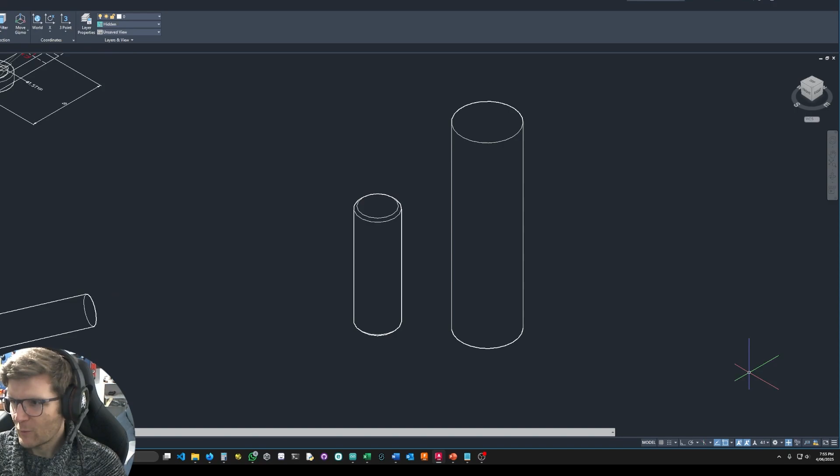You want to make cylinders to start because that's a good shape. Basically, a cylinder is an extruded circle. You have a circle, you pull it, and you stretch it out. So what we're first going to do, we're going to go back to the original view, which is the one you should be in. All right, we're in a top-facing and two-dimensional view.

So what we want to do, let's start with the crank pin just because it's simpler than the chamfered one. You grab it, you copy, you move the duplicate over here. Then what we're going to do next is switch to the 3D basics or 3D modeling. It does not matter as long as you switch. Pressing the gear causes the ribbon on the top left to change, and you'll see different commands now. But we're going to use the commands by typing them.

The very next thing you want to do is select the circle. And then you click on this view cube. You click not anywhere, you click on the bottom right. And by having the circle selected, it's going to change the camera view to a 3D camera view that is focused on the subject, which is the thing that you have selected. You have it now, and you know that the crank pin height is 42.

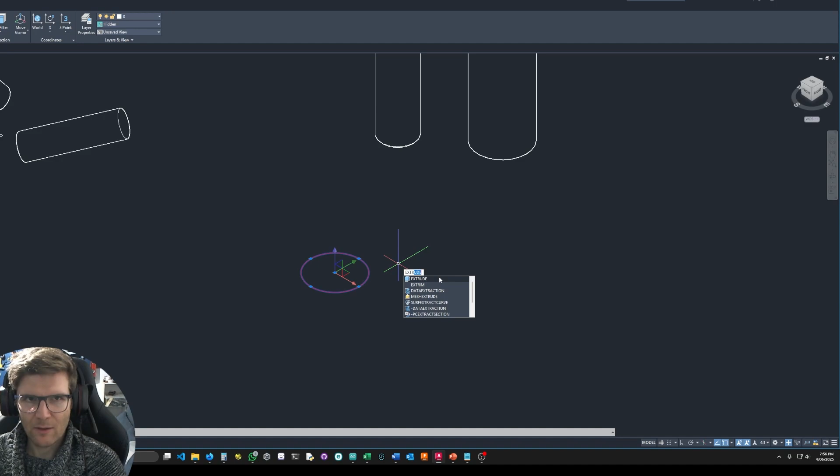So you extrude. That command is also present in the ribbon, but we're going to type it in. Extrude. Cool. And now you notice you selected it. If you pull downwards, you extrude downwards. If you go upwards, it extrudes upwards. And you're going to just be anywhere on the upper side and then type in 42, not 24, 42. Bam, you got a crank pin. That's as easy as it gets.

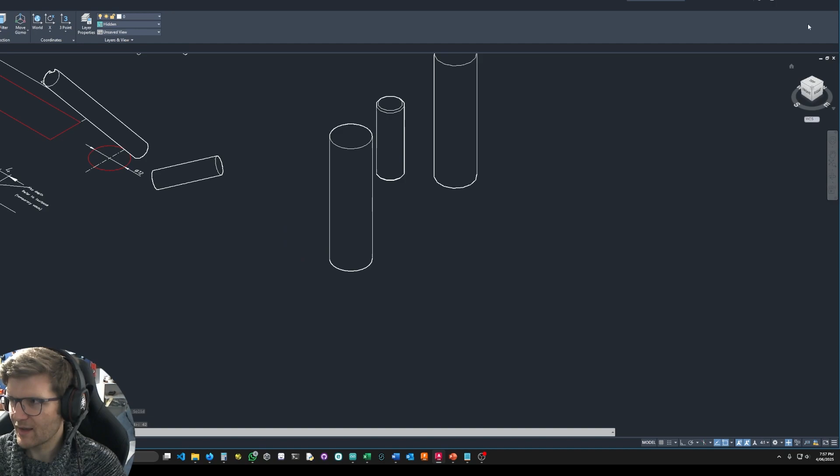Make sure that if you want to look around your 3D model, you have the model selected, because otherwise it goes crazy. You just want to have your subject of interest selected while you navigate. That way the camera always knows what to look at. Otherwise it gets confused, and then you have to zoom back into your view.

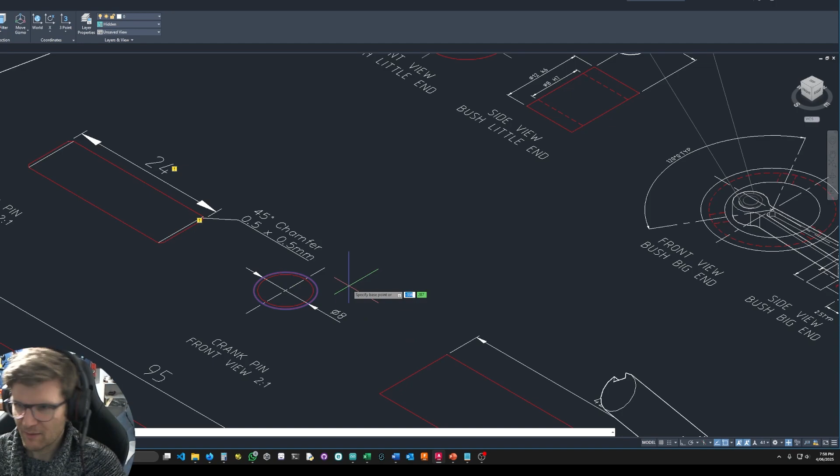All right, that's one. Now we're going to make this one, which is the crank. No, that's the gudgeon pin. Yep. So the gudgeon pin, as you might know, it's a cylinder with an outer diameter of 8 and a height of 24. So we're not going to focus on this inner side yet. What we do is first extrude this shape. So you copy it, you select it from wherever it is, you move it out to an area to work on it. So we have our 8 diameter circle.

We're going to extrude it to a height of 24. Same command, extrude. Specify the height. Again, upward. Type in 24. Now we're almost there. All we've got to do now is make the chamfers. For the chamfers, we're not going to use a 2D command or do any sort of manual tricks.

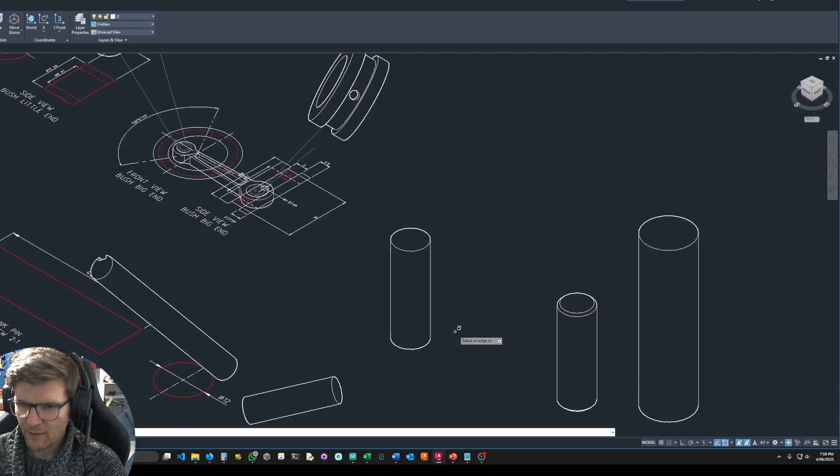We are going to use a very simple 3D command, which is called chamfer edge, which offers 2 arguments, loop or distance. We're going to use the distance one because we know that it is 0.5 times 0.5 for the chamfer, which amounts to creating a 45-degree chamfer. So specifying the distance, let's type in distance. You can type in dist or the whole thing.

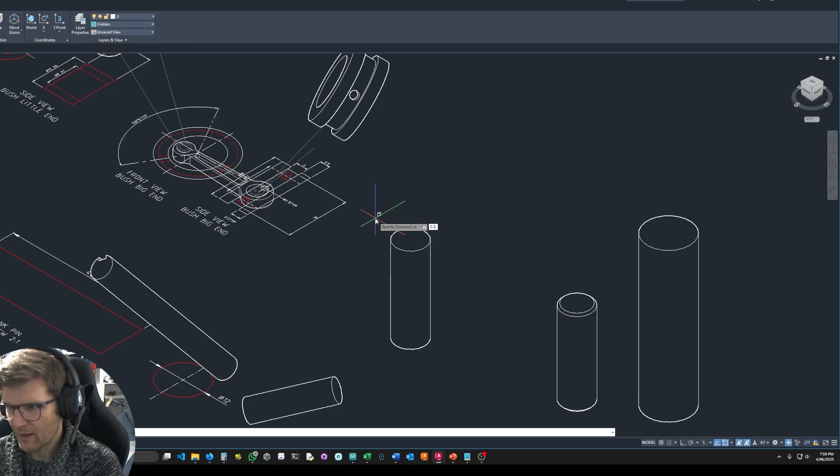Distance 0.5, that's distance 1, so that's one of 2. Now it's specify distance number 2, so that's the second one, also 0.5, which again amounts to 45 degrees. Now we zoom in a bit and we highlight the edges we want to chamfer. As you can see now, it becomes highlighted. Bam, that's 1. See the bottom one?

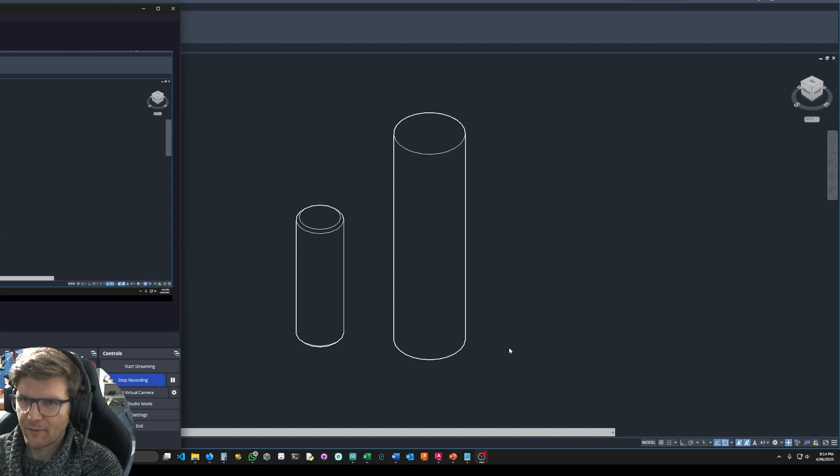Bam, that's 2. Now you have chamfered your gudgeon pin, and that's it for basic cylindrical shapes. Yep. All right, so you've now made 2 cylinders, and one has a chamfered edge.

It's possible that you have your 3D visual style set to a specific setting, which is not what I have. It's possible that you started out with 2D wireframe or something else. 3D hidden is one that I like, and hidden, they're essentially the same. They're nice because they give you enough information without all the bells and whistles of something fancier. It's cool, but I like keeping it simple for now.

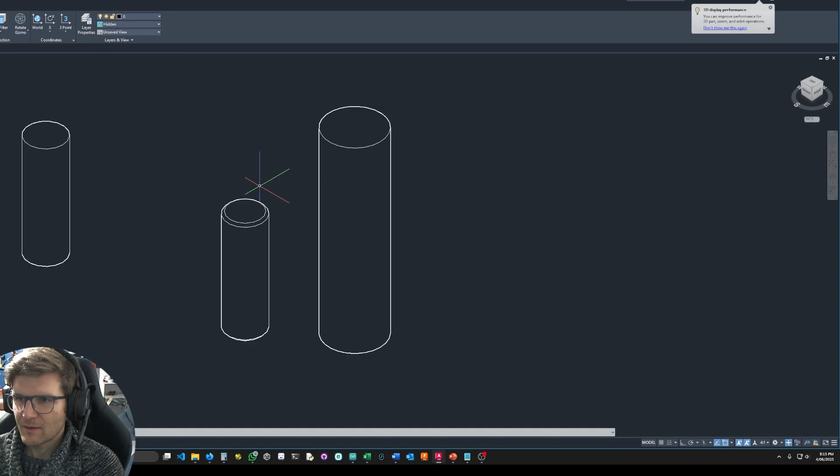So you have this, and you can tell that it's two different shapes that are three-dimensional. Remember to always grab models when you navigate the camera around it with the view cube. All right, deselect that. We're going to step things up and get to the next level, which is the connecting rod.

Here it is. This one takes a bit more work, but it's quite satisfying to make. So we get to the model, and let's get back into the top view. Grab the stuff first, then click top view. If you're in the wrong angle or orientation, click on the curved arrows on the top, and that will rotate the whole view cube, the viewpoint, to make sure you are upright.

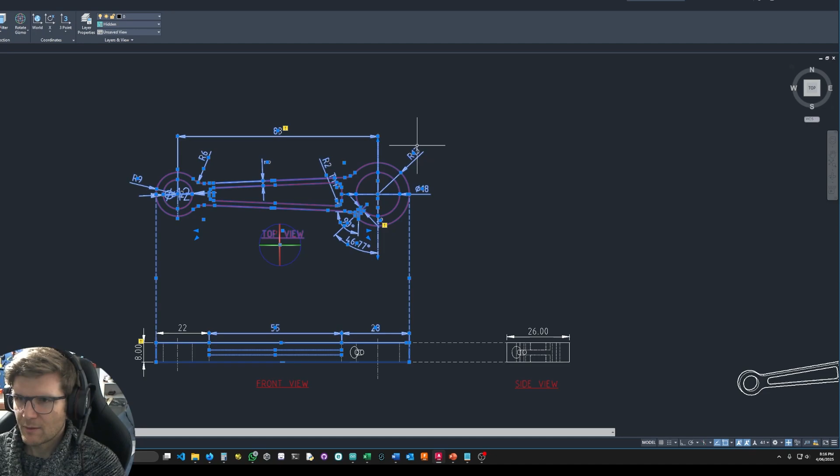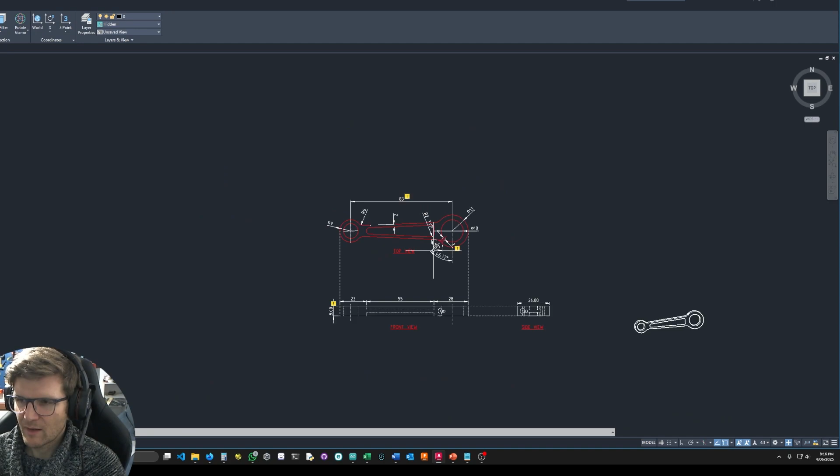So you have this. That's cool, but you've got to be more careful as to what you select, because there are all these dimensions in the middle of your thing. So this is my duplicate. I would highly recommend creating a duplicate, so make sure you don't work on the one already used for the layout. Go to your duplicate, grab all the dimensions, get them out of the picture. You don't need them, as well as center lines, any sort of annotation really.

Yeah, that's good for now. I would even surmise that this stuff for now is not going to be useful. We have the information on our duplicates, so we get rid of it. Really, we want all the stuff that is actually going to be extruded for now. Extrusion is in of itself quite easy. It seems like I still have some specks and things here and there. So now it's clean. You have a clean model to then apply 3D functions on.

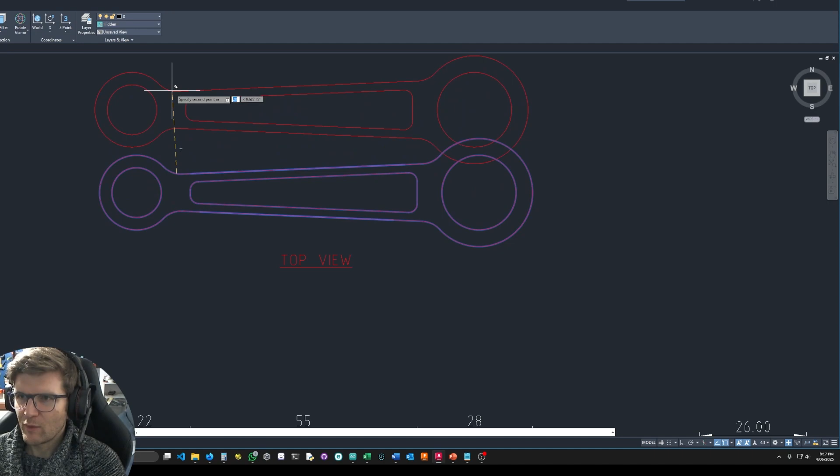Well, you can copy it and move it if you want to make a duplicate. In my case, this is already a duplicate, so I'm going to work on this. Get rid of that top view as well. You have this, you know the drill: grab the thing, go to the bottom right. Now you have a three-dimensional view of your model.

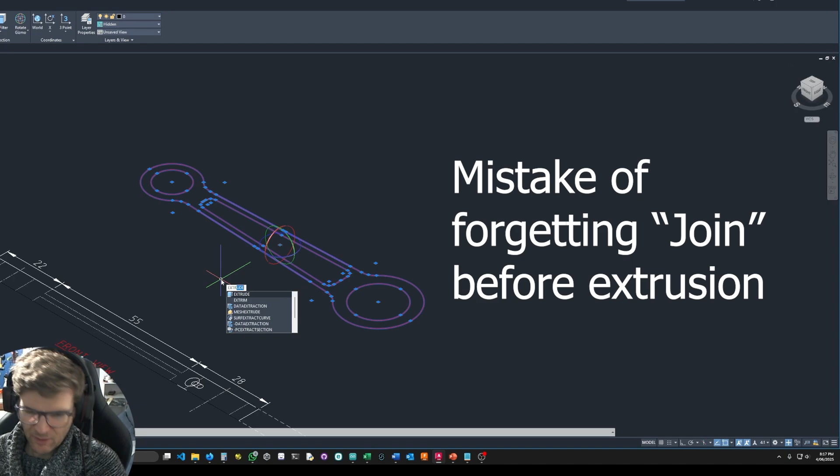Now we're going to, with the model selected, type in extrude. And now we know that the height of extrusion is 8 based on the other dimensions. So you see here, we're going to extrude upward by the number 8. Right, you have the thing, it's here, and it looks cool, but there's a lot of stuff going on.

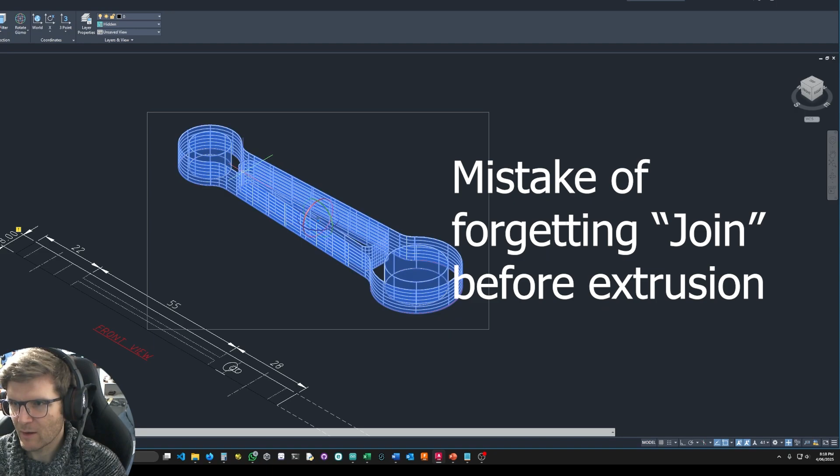So we're going to simplify the shape by saying join, and now I think it's that, or it's group. Cannot go wrong with group. Now it's one shape. If I click anywhere on the shape, the whole thing is selected. It allows for a bit less of a headache.

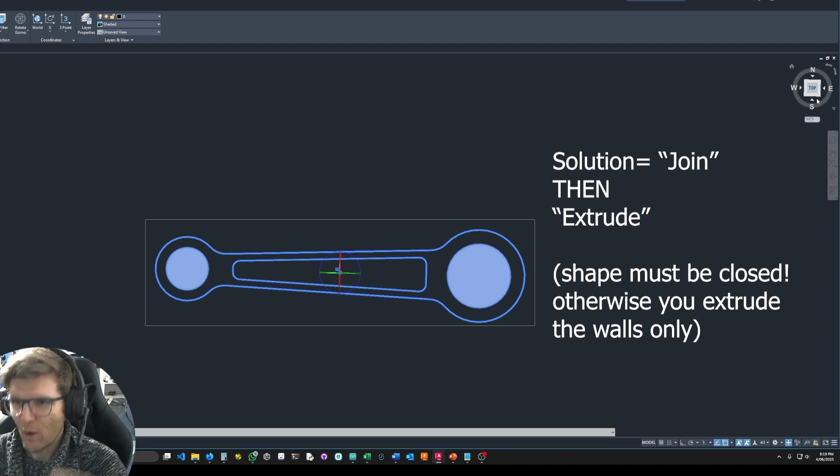Now, there might be a problem in the extrusion. I'm going to check a different shading. Yeah, okay, so this is a problem I have right now. What I should have done is actually first join, then extrude, because it was not a closed shape when I extruded it, causing it to consider the edge to be its own enclosure, and the inside of the shape was left out of the calculation. Now we basically have just the walls, and that's not what we want. So let's go back.

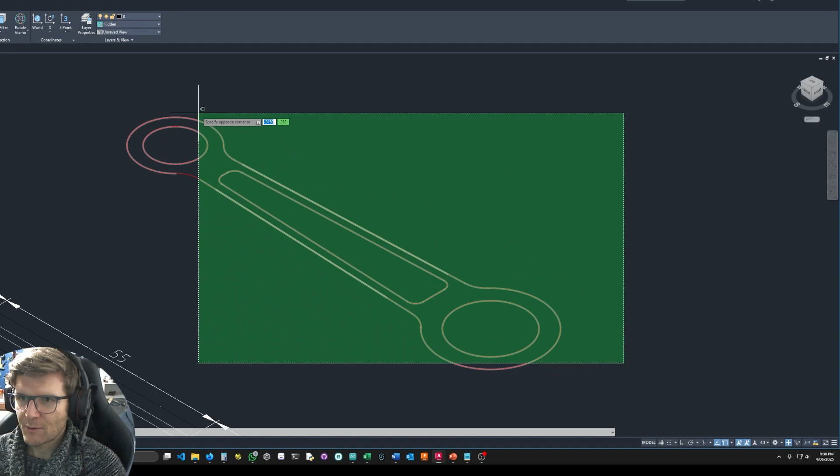I'm going to cut here, and this is how not to do it. So if you've made the mistake of extruding before ensuring the shape is unified by using the join command, go back through your steps, undo, undo, undo, until you're right back to this stage, which is where I went wrong. As you can see, I have all these distinct line segments, and what we want to do is join together anything that's meant to be part of the same shape. This will allow the extrusion to not be a misunderstanding of what we're trying to work with.

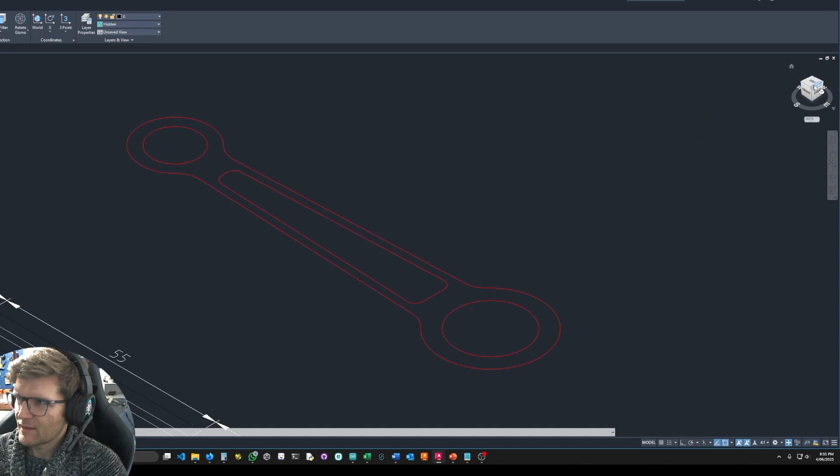So we have this, you grab everything, then use the command join. Now we have 4 distinct shapes: 2 circles, a trapeze in the middle, and the external bone shape of the connecting rod. We're still in this 3-dimensional view. That's going to change in a bit.

We're going to select the trapeze first. Let's start with the trapeze because it's a bit more intricate.

As you might know, by pressing distance or by measuring and doing the dimensioning, the trapeze in the middle has a whole thickness of 8 millimeters, but we want to dig out 3 millimeters on top, and we want to dig out 3 millimeters on the underside.

For that, we're going to use the command subtract at some point. So we remove from the 8mm, 3 on top, 3 underneath, leaving 2mm in the middle right here.

But before we do that, we want to have at least one of the two trapezes extruded. So we're gonna do extrude, and 3 is the height of one side of the trapeze. Cool, so we have now extruded the trapeze.

The trapeze is one of two instances. We have the bottom one and the top one, like a sandwich. So you have the bottom bread and the top bread, and we'll leave a gap in the middle.

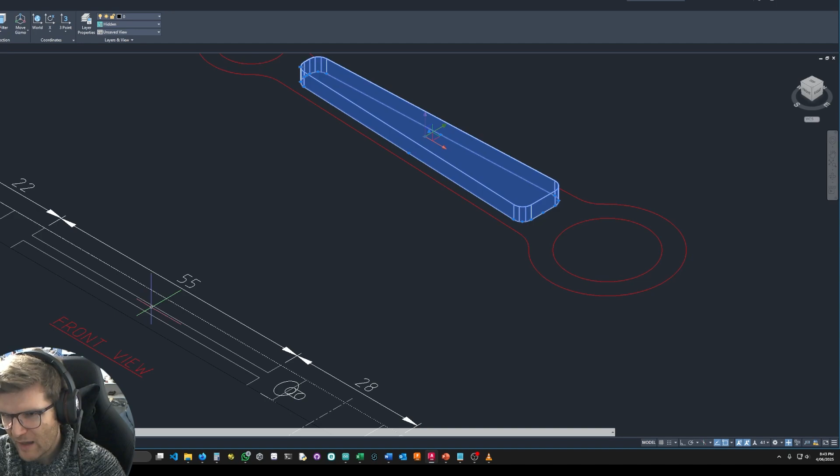So we get back here, and then what we want to do is copy and specify a base point anywhere. I would recommend using something easy to refer to. Click, and then click again, enter. I believe that now we have duplicated the shape exactly where the original is.

Seems like it. What we want to do next is displace the copy that is fused with the other one, overlapping, superimposed, whatever you may want to call it. You highlight the trapeze, and then we're going to displace it upward.

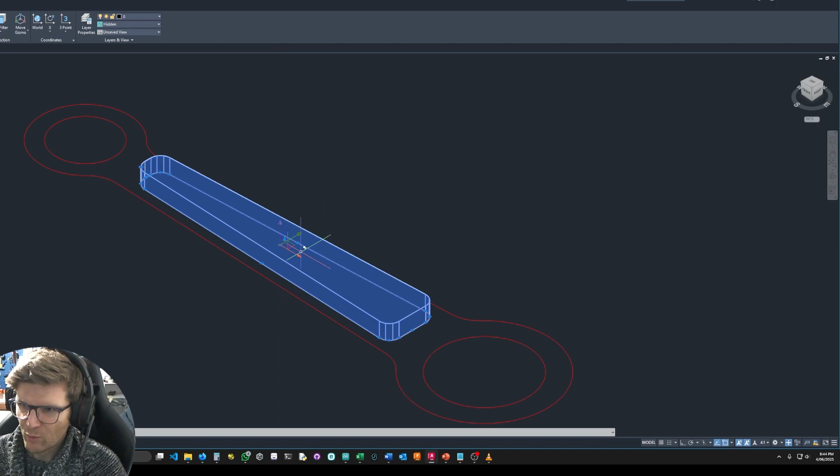So depending on what you've currently got as a thing in the middle, you'll see this thing here, right? This sort of the Cartesian coordinate thing. What we want to do is right click at the very center of that blue intersection, and when you do it properly, when you highlight it, it should be orange.

So let me try again. You see, here's my cursor, and if I get onto that blue diamond shape and then right click, you see move. You can choose also rotate and scale, but we want to move, so we have this.

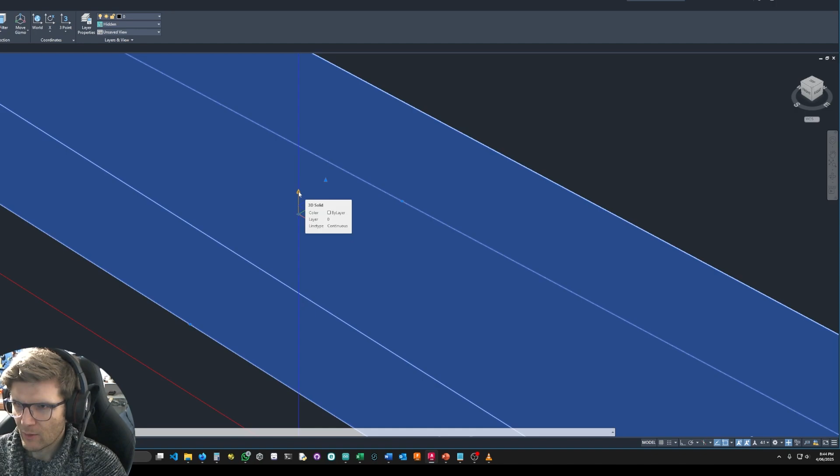What we then do is click on the blue one, because blue is Z, hold it down, go with the cursor somewhat upward, then press 5, because 3 of the thickness of the trapeze plus 2 for the gap should mean that when you face it frontwards now, you've left a gap of 2mm in between.

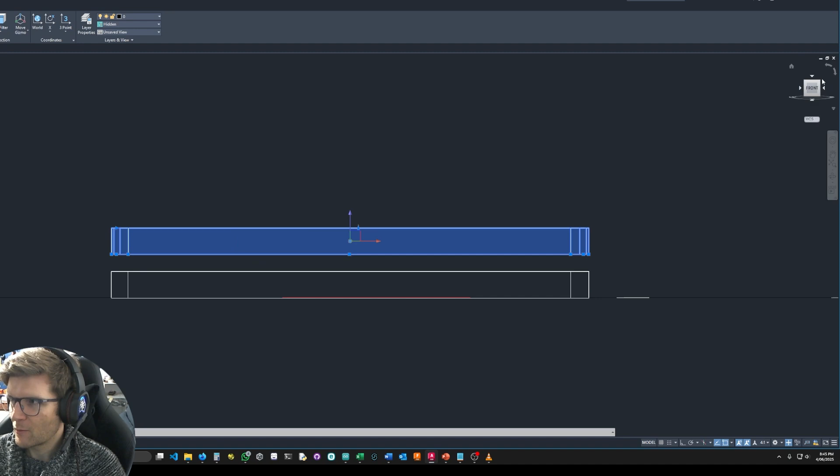So remember how you hold on to that model and then click front or corner or top to navigate between the different types of views. We have this. So this is actually what will be subtracted, but for now they're the positives.

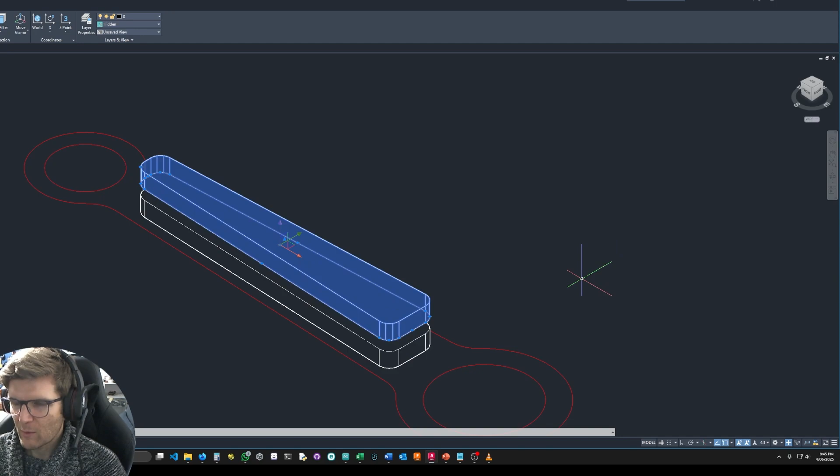And then once we have the rest of the shape, we will select these things and remove them from the pre-final model. So we have these two things. Now what we want to do is the two circles.

Actually, now we can do all the rest. So grab all three things. Bam, bam, bam. Now what you want to do is extrude and give it an upper height of 8, which means that things were done properly because my upper trapeze lines up correctly with the rest of the shape.

Do not forget to always highlight the object before manipulating the view cube, because every time you don't, you will be zoomed completely out of your view, and it's a real pain to scroll back into where it's happening.

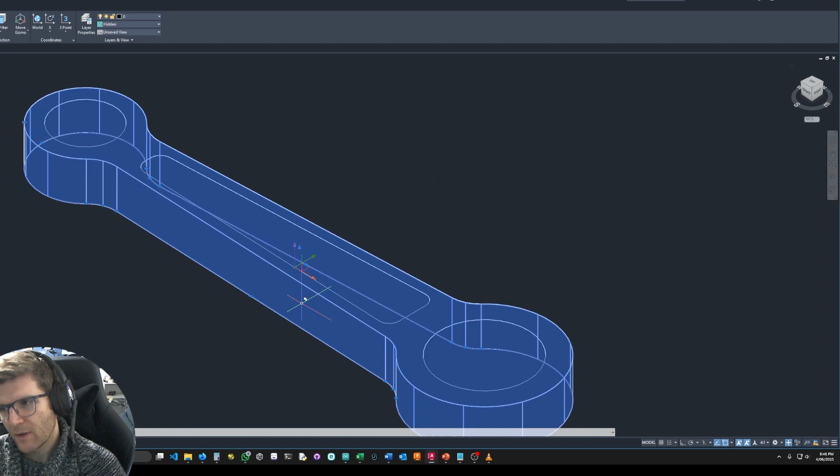So you have this. It's cool, but it is if you give it all the color, it's not exactly the final result we're looking for. We have a solid thing, and we want to have subtraction of the negatives.

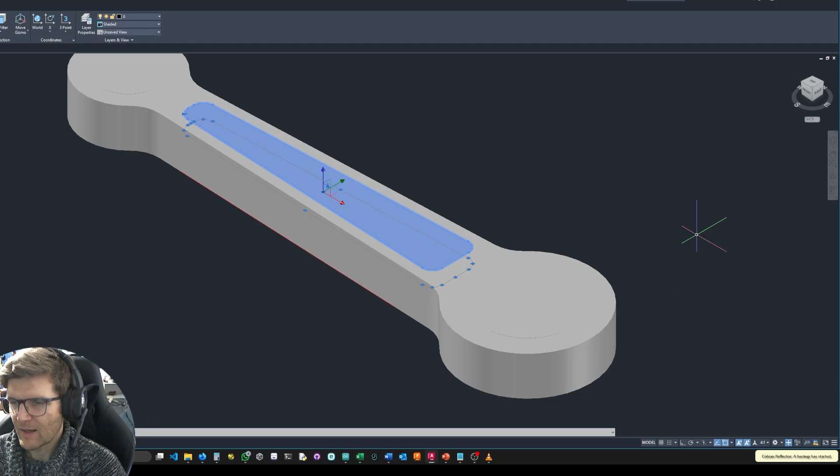So grab everything that needs to be removed. In our case, the two circles and the two cylinders and the two trapezes. So it might be a bit of a pain at first to find the things.

I recommend changing views to something a bit more pure, like hidden or the wireframe. Wireframe is a bit complicated. The best is really hidden.

Cool, so we're making progress with the connecting rod. We've extruded it, including what will be subtracted. Let's do a little recap.

Make sure that you are in the visual style that is called 3D hidden. And to get that, if you don't remember, you go first to 3D basics or 3D modeling as a setting instead of the drafting and annotation. So you go back to your gear and select one of these two. All right, so you selected 3D hidden or hidden.

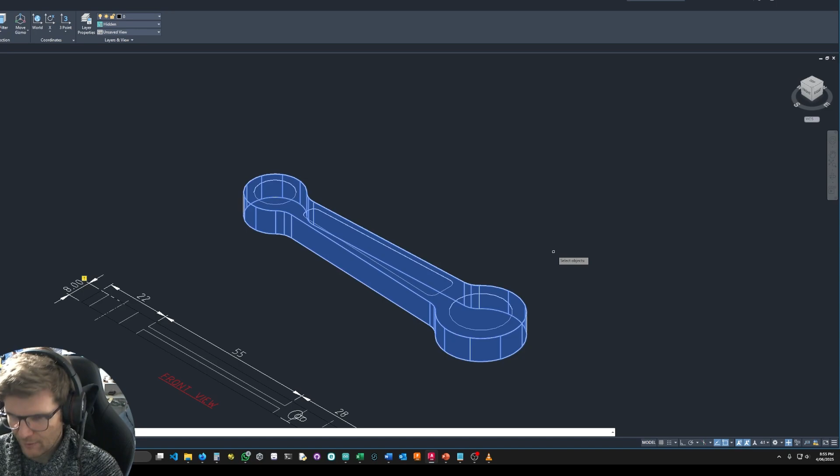Now that we've got this, we want to perform subtraction. We'll remove the 3 ones that are currently facing the top. So subtract, select object. The first part of the command of subtract is asking about the positive, what will remain at the subtraction. So you say enter once you've selected the outer bone shape of the connecting rod. Then you press enter.

Then you select the inside, and for the inside you highlight and click on the inside of the shapes. We're going to subtract just the upper parts for now, and then we'll do the underside.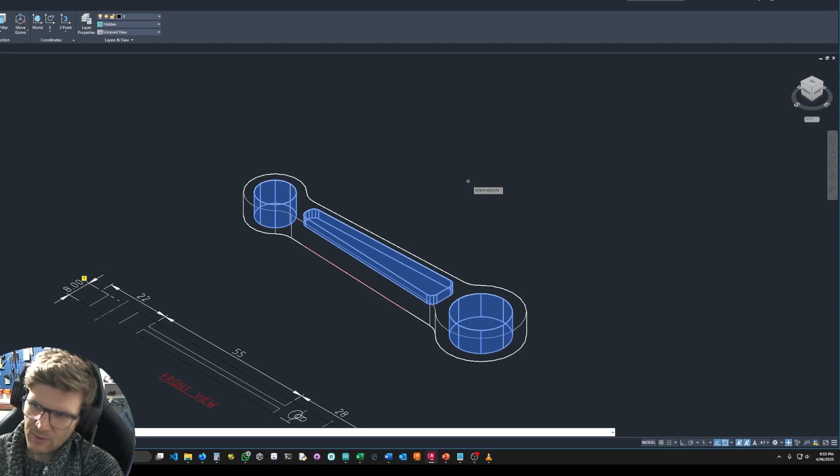Here we go, double enter, and now it's removed. Let's select everything, and if we navigate, you can see that we've hollowed out the two circles, the two cylinders, and the trapeze in the middle for the top side. You might notice we have yet another trapeze in there that needs to be subtracted.

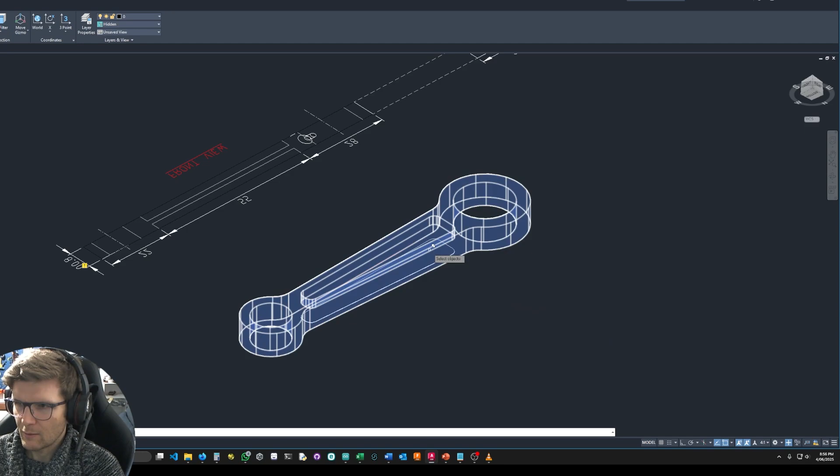Let's select everything and go to the underside. You can see it's still there, as it is flush with the shape. You subtract once again: first selecting the exterior shape, the positive, press enter. Then you select what needs to be subtracted from that positive.

It's a bit finicky, but here we go. Take your time with this and take as many attempts as you need. Then you press enter, and then for some reason press enter again. Now you will see that it is one shape.

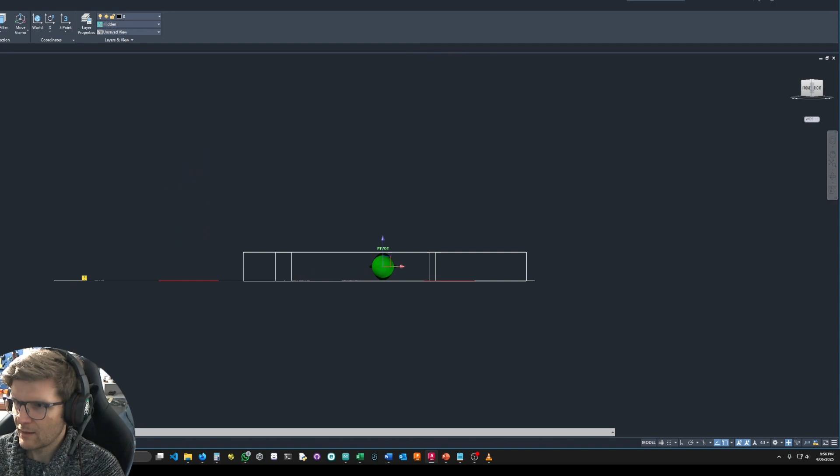So we've hollowed out the underside, the upper side, and of course the two cylinders on the right and left side. That is some progress with the connecting rod. Next step we're going to do is the countersunk hole.

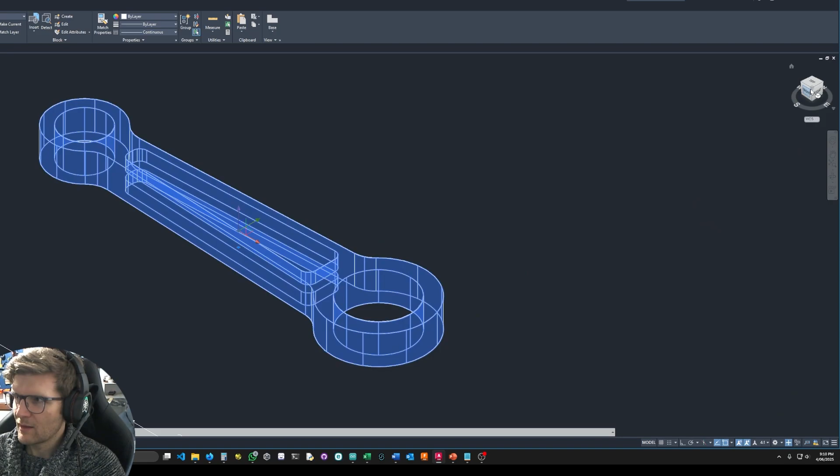Before we move on to the countersunk hole, one valuable tip when working in 3D is to select the model, place it in a fashion that is neat and easy to recognize, then right click on the view cube and set current view as home. So whatever you manipulate, around this object or another, you can always click on the house logo at the top and it will send you right back.

That's going to be really useful now because we're going to travel back to the original design. I'm going to scroll out and into the drawing to the place where I have my original copy of this, which is the third angle projection version.

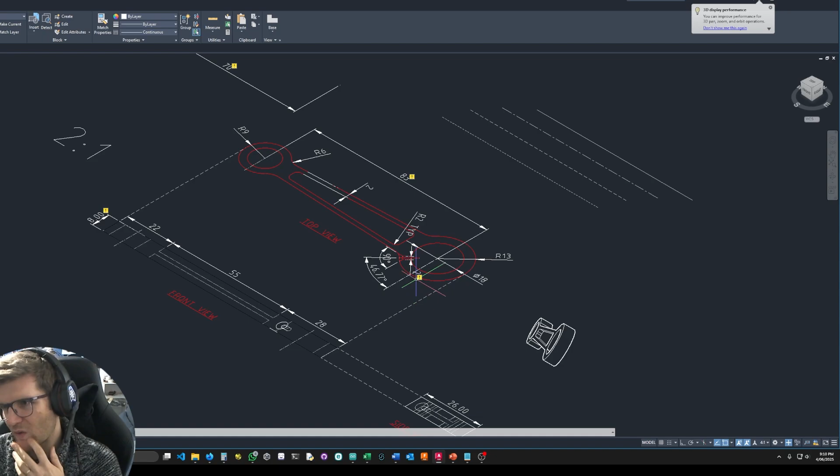And here we are at the top view. So we are back at the third angle projection with all the dimensions, with all the views. We're doing that because we need to remember what are the dimensions for the countersunk hole.

For the countersunk hole, what we have is, in my case, a 2 millimeter diameter for the cylindrical hole, so the prolonging here is 2 millimeters in length. And then we have this dimension. This is a custom measurement I've made.

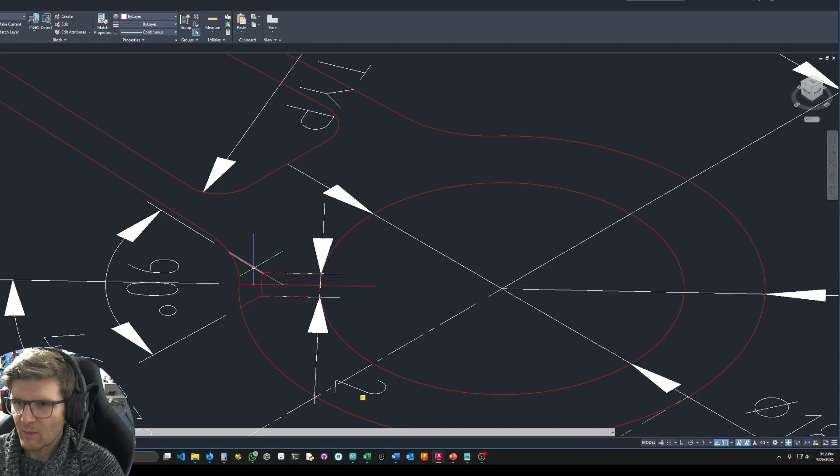I have ensured that my countersinking is at a 90-degree angle, so it's still at the right position at 46.77, but the conical thing is at 90 degrees. I checked online, and some of the ISO standards for countersinking are 90 degrees, so that's why I did that.

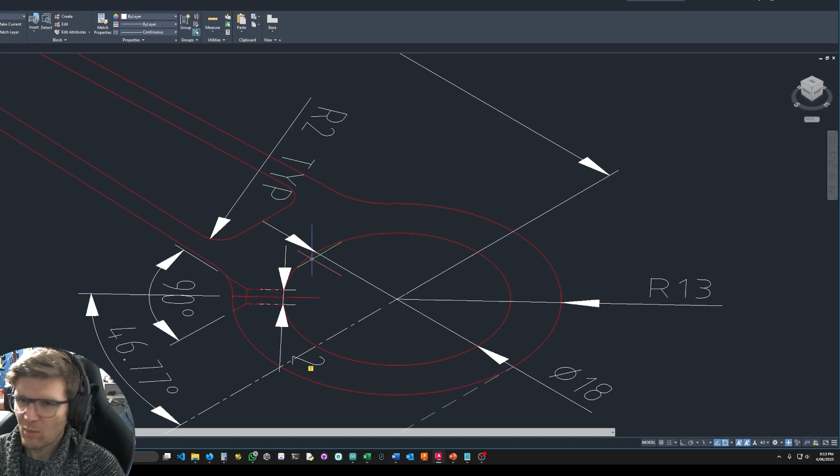Knowing that, we are going to fly right back to where we were previously in the model, at the 3D model. Because we've just saved the view with the home, we can go right back to where we were. Now we're going to do the actual countersunk hole.

We have now traveled back to our 3D model. In order to create the countersunk hole, which will be subtracted from the big shape, we're going to make it a positive first and then perform the subtraction.

I'm laying down a line here so I can easily see where I'm putting down the circles to be extruded. I am making a circle of diameter 2. Make sure you're using a circle diameter, or if doing a radius, make it half the value of the diameter. Then you do a second circle on the opposite end of this line.

It doesn't have to be too big, but it has to be somewhat bigger because it's going to converge to a point which is going to be where the cylinder is going to rest on top. This bigger circle is the cone, the future cone.

Extrusion: we're going to start with the smaller 2 millimeter side, and we're going to pull it up. Not too much, not too little, because it needs to be long enough to poke through, but not so long that it pokes through to the other end of the shape. So let's say something like 7.

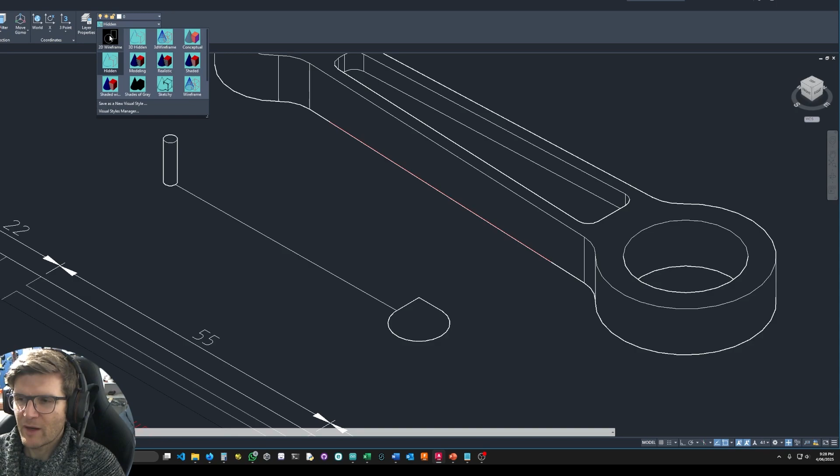All right, so we have the two extruded parts, the cylinder and the cone. Now what we want to do is fuse them together. The first step is to make them converge to a single central point. I said earlier that I recommended switching to a view where the other side of the model is hidden, but now we might be better off with wireframe so that we see the line where the two models converge. So now we're in 2D wireframe. Also, I recommend ensuring we're back in 3D basics.

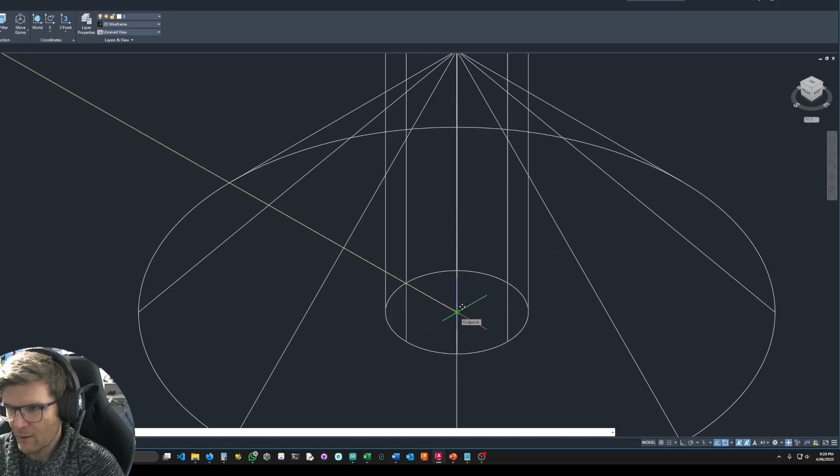And now we're going to do move. We grab the center of the cylinder over here, then move over here and put it where the center of the cone is. And now they should be converged. I'm going to switch to another view to show that. Okay, it looks good. As you can see, it is in the middle. All right, let's go back to that top front right view. Okay, so we're here.

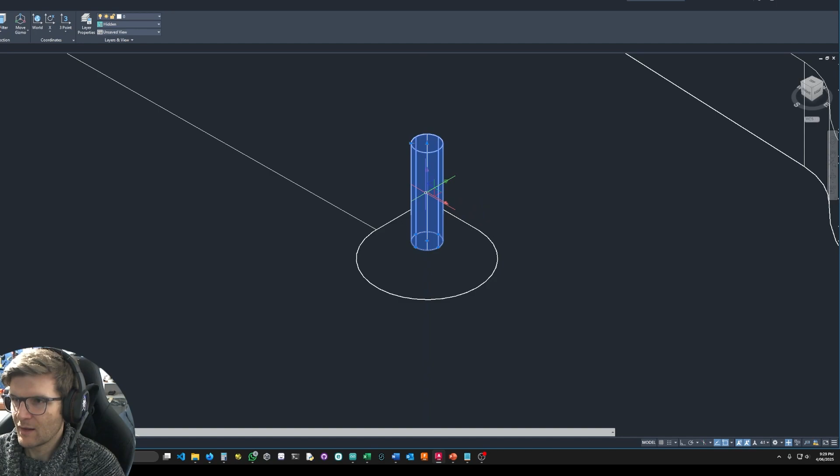Let's just bring up the cylinder a bit, using the blue arrow for the Z axis, so it sticks out enough. We can now delete this line, and now we're going to put it inside the connecting rod. For the next part, we're going to first join together the two components of the countersunk hole, positive version, and then rotate it and move it into place so that it is lined up where it needs to be, so we can then subtract it from the overall shape.

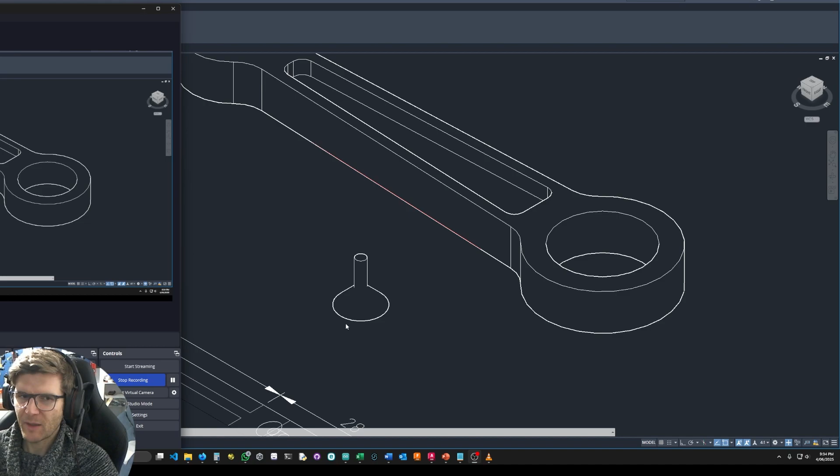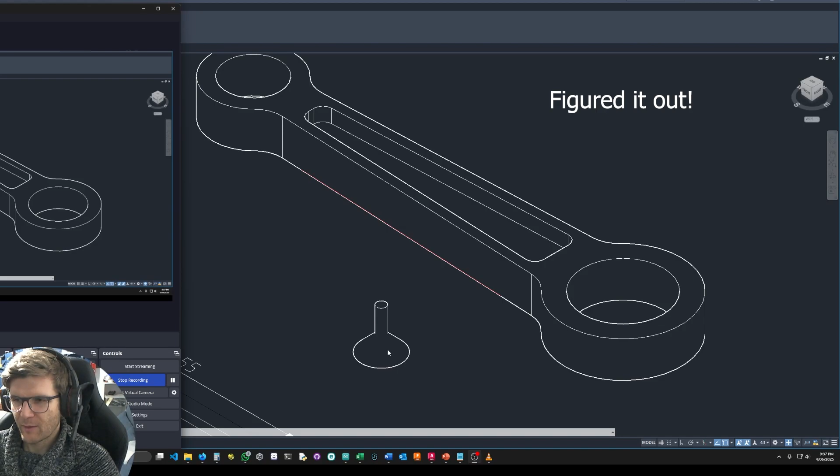First thing we're going to do is grab parts 1 and 2, and then we're going to use the function group, not join but group. By holding down shift, you can actually lock in. Now I'm pressing shift and it wants to position like that, and that doesn't work. So I'm going to try again. Cool, we have combined the two shapes into one by using the group function.

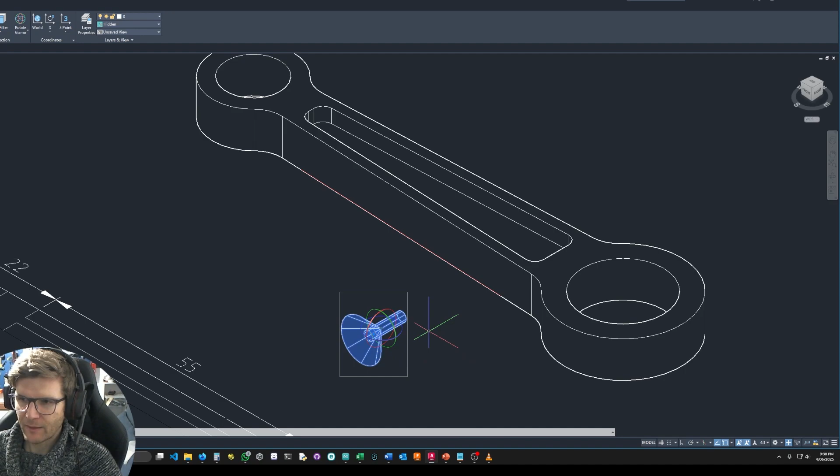Now we're going to rotate it, and to do that we type in 3D rotate. For the base point, let's just say here, and then we select the rotation axis, which is going to be the x-axis, the red one, so that the cylinder points towards the connecting rod. I'm pressing shift. Does that work? Yes. By holding down shift, it's kind of like magnetizing it to 90 degree intervals. All right, so it's pointing towards the connecting rod.

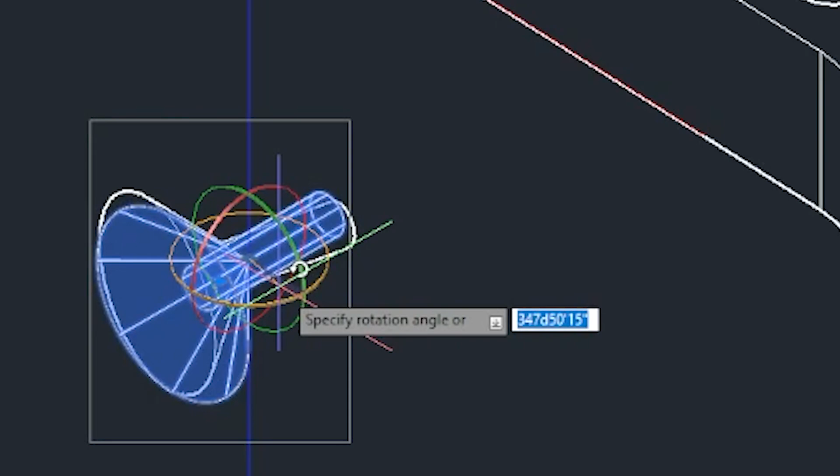Now we're going to grab it again and rotate it on the z-axis. You click, hold, and while holding it and slightly being on the side that you want to rotate it towards, you type in 46.77, and now it is pointing towards the appropriate position.

Okay, now that we have oriented it through rotation commands, we're going to move it into position using the move command. But before we do that, it might be worth getting the blueprint so we can compare. So we're going to zoom out and grab a copy of the original blueprint. It's over here, so grab the whole thing like this.

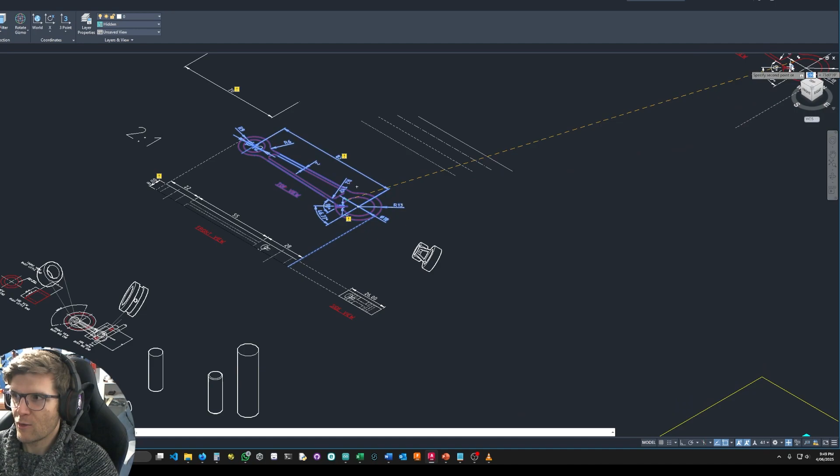CO for copy, click, then press on the home logo, and now you brought it all the way over here. And that's going to be a bit handy because then you can place it right underneath the model. Cool, we place the copy right underneath the model. What we do next is switch back to wireframe visual style so that we can see right through the model.

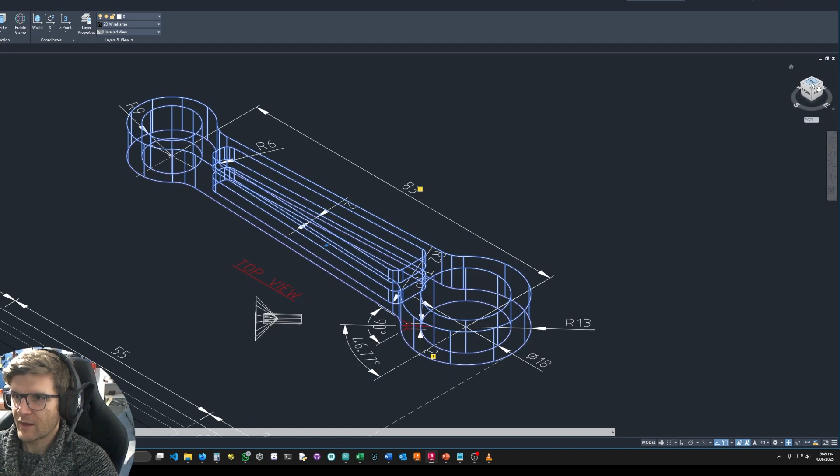Next, we click on the model itself, the big connecting rod 3D version, and then press on top and ensure that we're in the right orientation using these curved arrows on the top right side of the view cube. We're here, we have a 3D model, we have the hole. We're gonna now just kind of wing it by moving it in place. I know this is not exactly proper, but maybe it snaps in position.

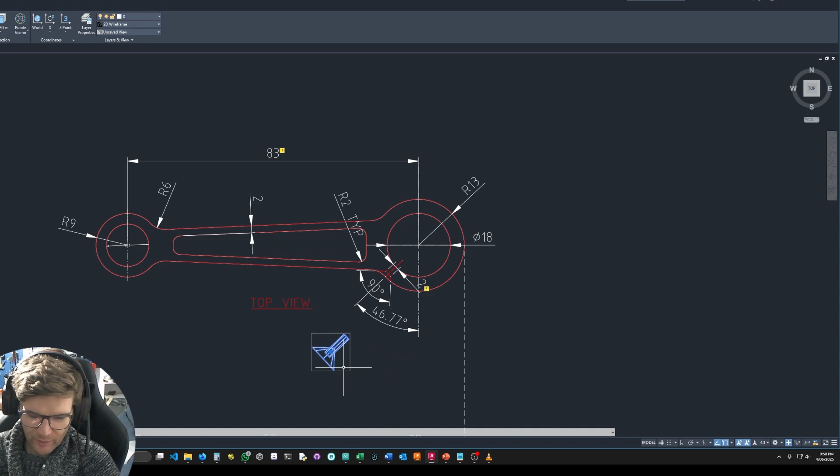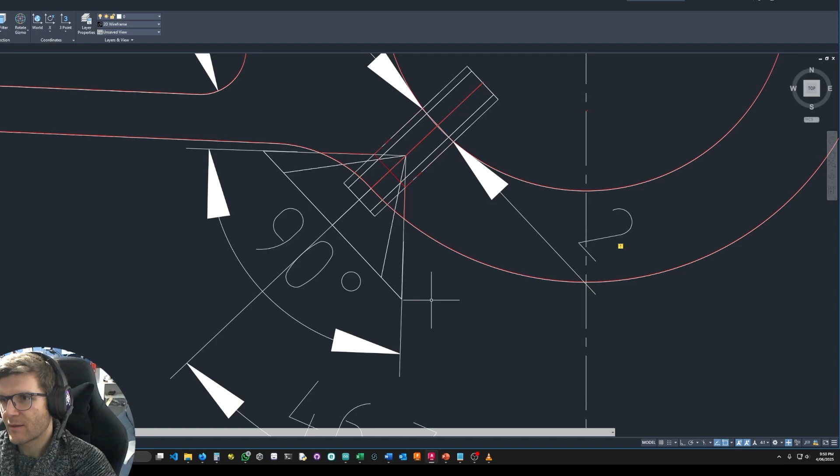Ideally it would. All right, so for that I'm gonna grab the converging point of the cone and the cylinder and kind of place it where it just feels right. So just about here. Bam! Awesome. As you can notice, a lot of the cone sticks out, but that's fine because it's gonna disappear once we do the subtraction. I know it's visually a bit busy right now, but not for long. All right, let's just grab the cone and then click right, bottom right of the top flat side, zoom out. While we're back in this view, what we can do is get right back to 3D hidden.

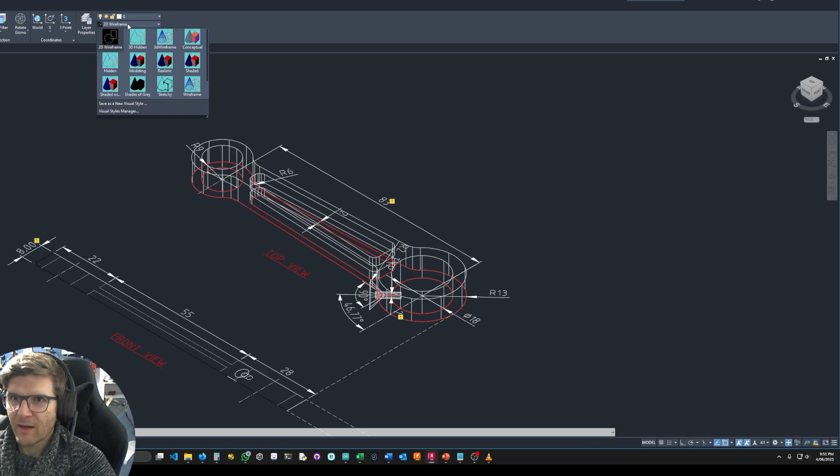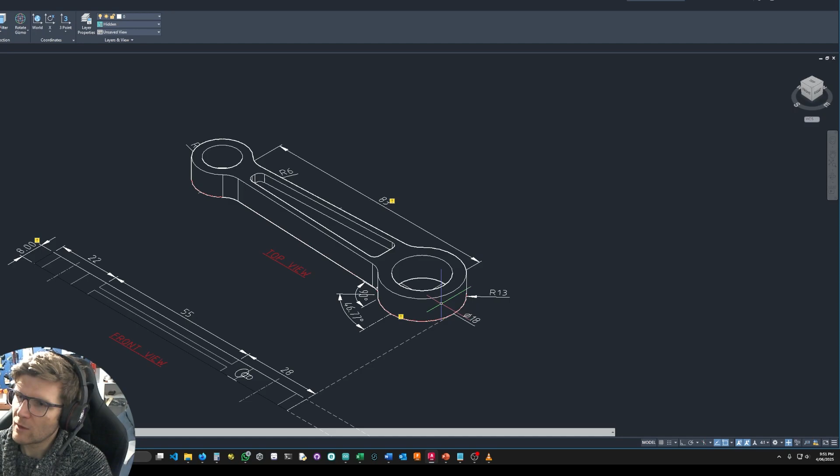Now what we do is perform the subtraction. For that, subtract, select the big shape. This is what we're going to subtract from. And now we're selecting what we will subtract. So you click enter twice, then you select the other object. So in this case, what we are using to subtract, and you press. And now if everything is well done, you should have a hole that is at the right place. In my case, it's not. And I don't know why.

Fix it, fix it, fix it!

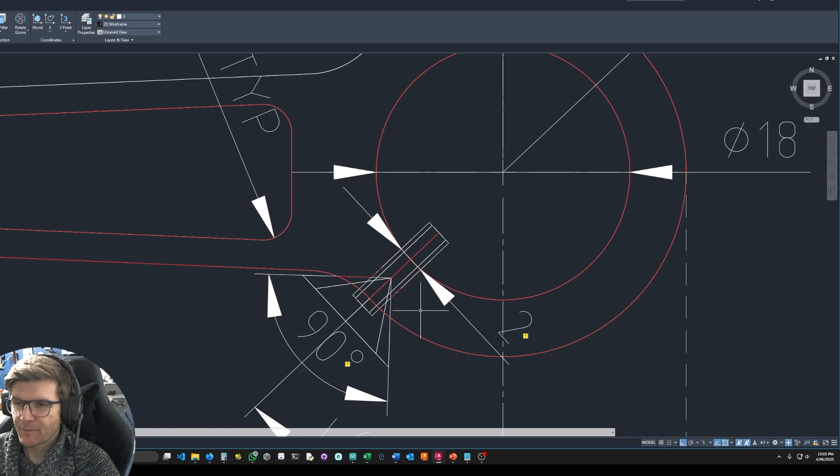Cool, so you got to this point. You've placed it using the top view cube position and aligned it so that it is aligned with the blueprint version. Now, it might look like it's ready to be subtracted from the main shape, but if we change position to a front view, we notice that it is in fact too low. In my case, it lines up exactly with the orthogonal plane for the XY. So what we're going to do is move it up, of course.

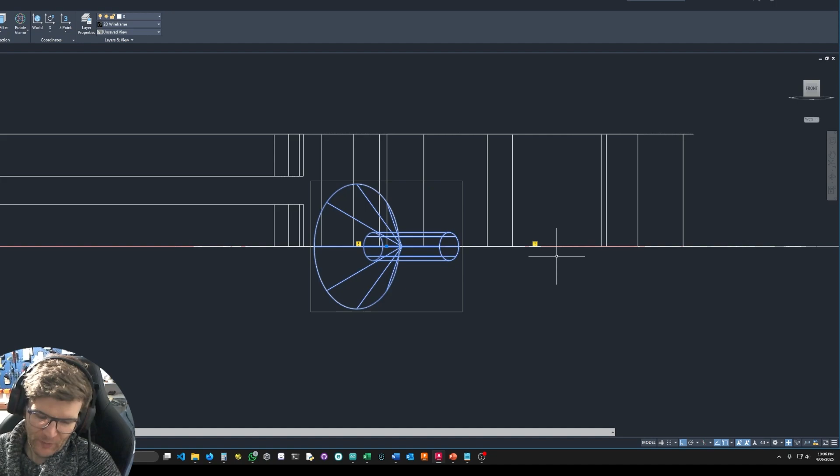So we're going to perform a move function, and instead of specifying the base point and moving up manually, there's only one dimension we need to focus on right now, which is the Z dimension. So we type in displacement in the move command, which gives us the 3 coordinates 0, 0, 0. We want to only interact with Z. So we do 0, comma, 0, comma, and 8 divided by 2, which is half of the thickness, is 4. So we type in 4. And now it is exactly where we want it to be.

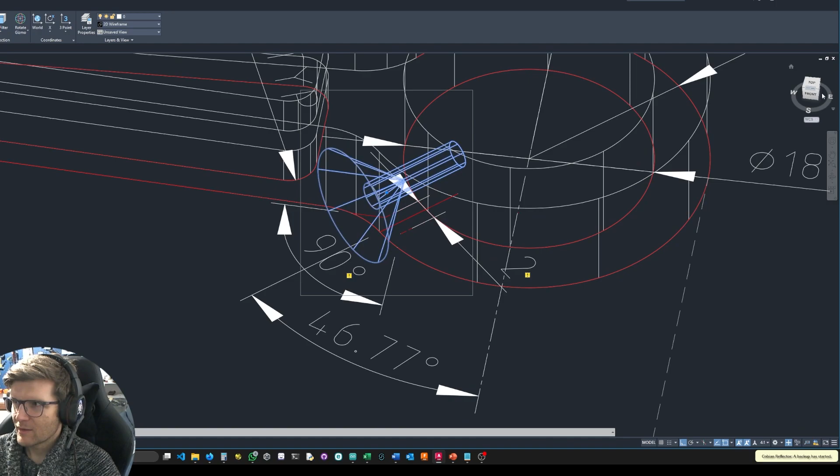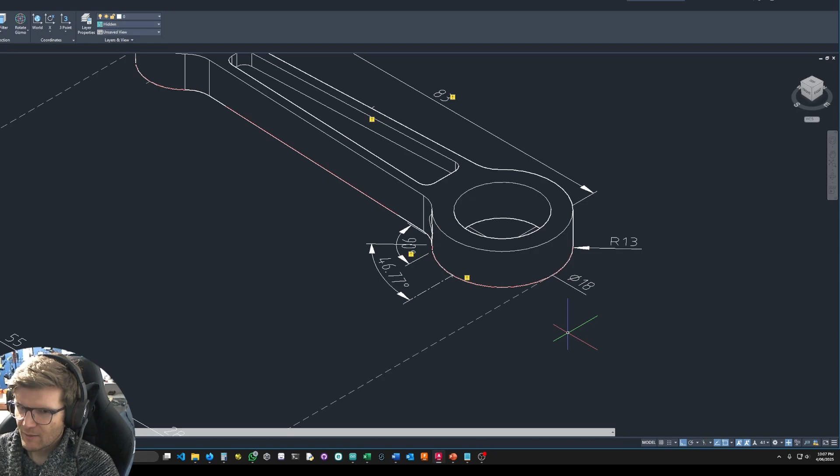So now we finally get to my favorite part, the subtraction. Let's get into a nice view and switch to a different visual style. I recommend hidden. Alright, so we're going to perform subtract. Deselect everything, type in subtract. Select the object that you want to subtract from, the main shape. Enter. Now select the object to subtract, the cone plus cylinder, aka countersunk hole. You press enter, and now if everything went correctly, we have the exact shape that we need.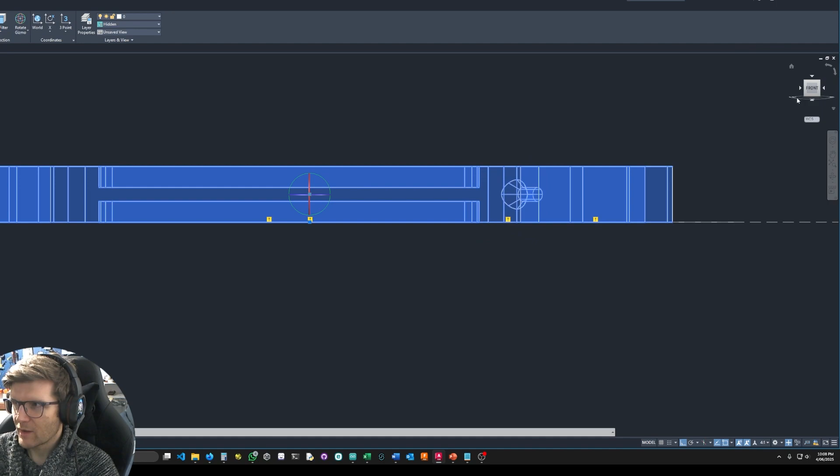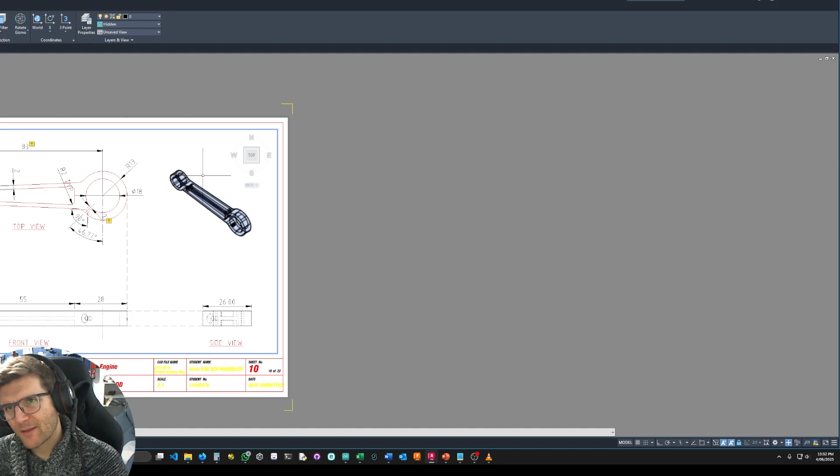Before we get to the next part, I'd like to show you how not to do things, because I've been playing around with this for a while and I haven't always learned things the right way. In my case, I have been trying to get a 3D model to be represented in an isometric position within the same viewport as the flat models, the third angle projection blueprints.

And the problem with that is that what you do is actually manipulate the object by performing 3D rotations in order to approximate an isometric view. And the problem with that is that I don't know exactly the rotations, the degrees, the ways. Honestly, it has been quite a nightmare.

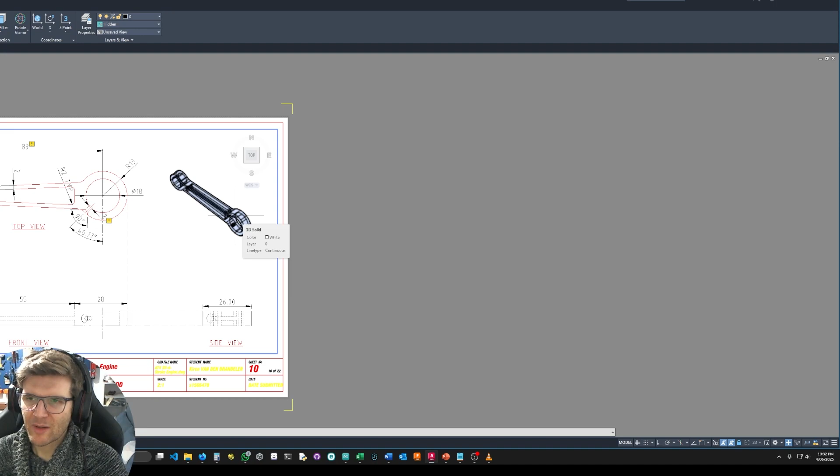I've been spending up to 30 minutes trying to get things to look almost right, and even right now, if you look, you'll see that it's not technically isometric. It's a bit angled, like it's tilting towards us. So in order to not have this problem, we're going to have a different approach.

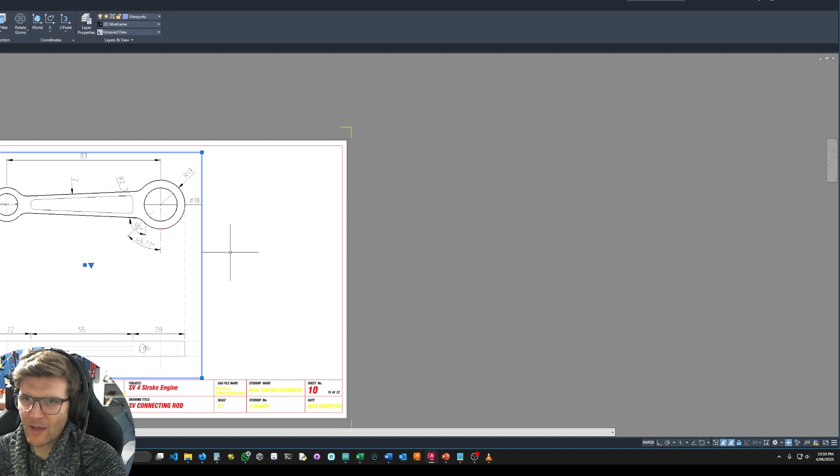So this is our current project, our current version, and what we're going to do instead is create a separate viewport within the layout. So don't worry about that side view. I'm just for now cropping this so that we create some space in the top right to allocate space for a viewport that will be dedicated to a different camera.

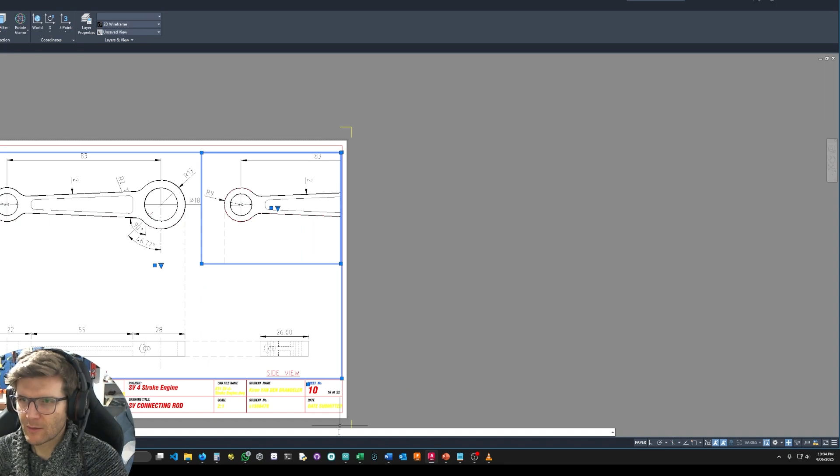And so we're going to copy this and place it here. Now we have a copy. We're gonna resize this layer, this viewport, okay? And before you do anything in terms of resizing this and deciding, oh, I want to already do this, wait, don't do it. Because what we're gonna do next is moving this.

We're going to move the model out of the way, someplace safe where the blueprint visually will not interfere with it. Then we go back to the layout. We move to the right. Right, one more thing. You might see on my bottom right, I've locked my viewport. And so what you want to do is unlock it.

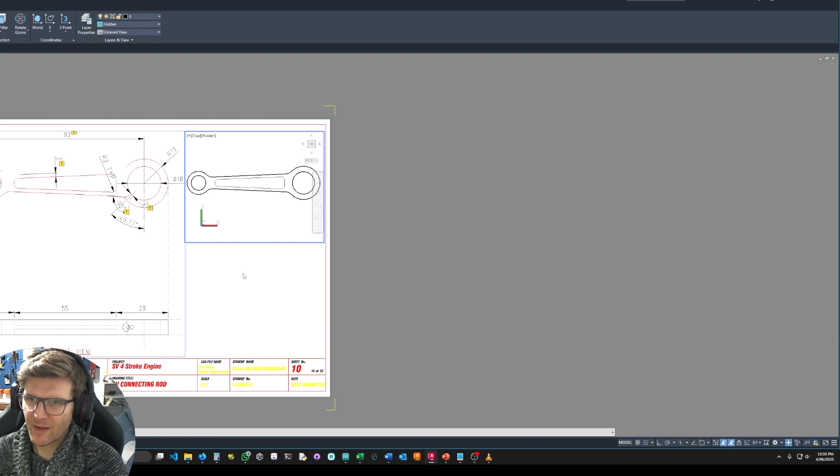And then once you've unlocked it by clicking on the padlock, you should be able to pan the camera up until you find the model in question. Excellent. Then you zoom out, okay, here it is. Now I'm going to double click away from the place. Oh, escape, then double click. All right. So we have two different viewports.

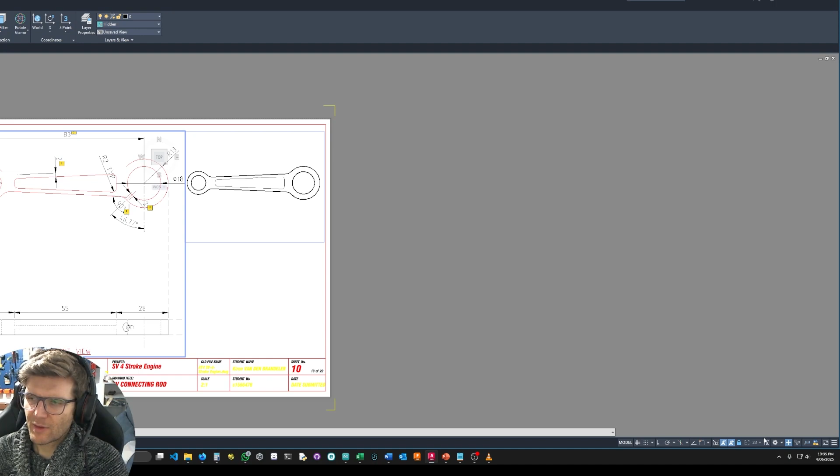One is currently unlocked and one is locked to the 2:1. So if you want to know how to do this, you select your scale, then you click on the padlock, and that prevents you from scrolling and messing up the scale by creating these crazy irrational numbers. So once you're back here, you have the model.

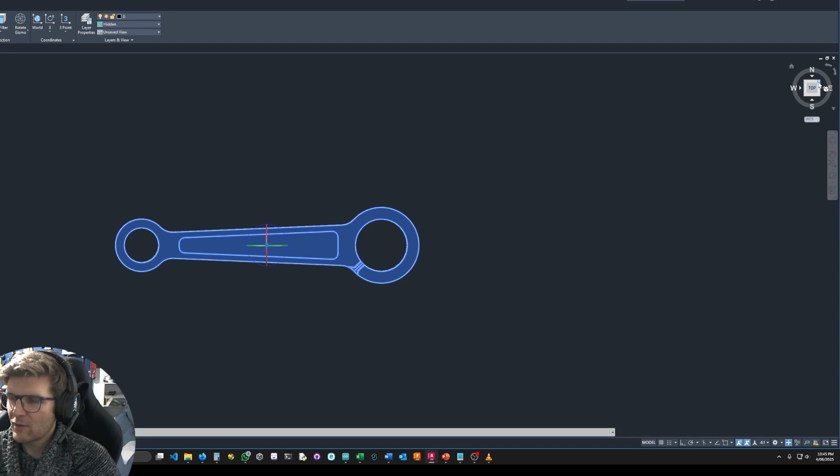Bear with me as we apply one rotation by 90 degrees on the model, and then we do the rest with the camera. So we are going to first head back to the model, zoom in on the usual suspect, and then go back to our top front right view. And now we're going to do a 90-degree change in the position of the thing. Cool. And what happens if we now head back to this? All right, so it's now laid flat on its side.

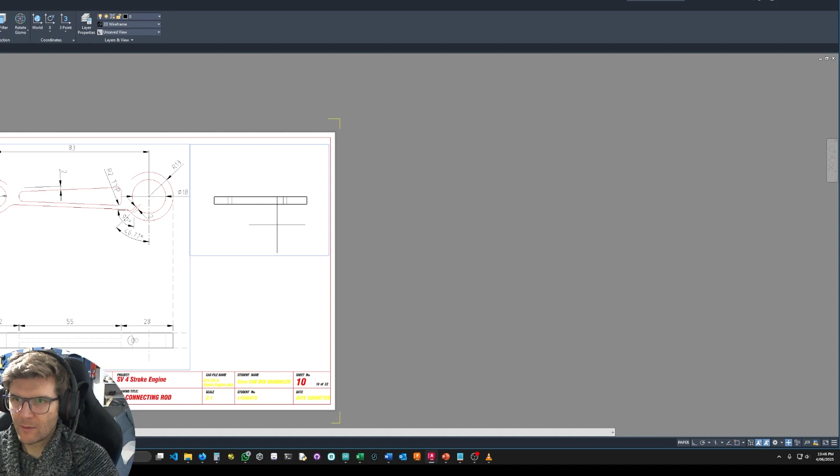What we then want to do is double click here, and then let's try select the model, then click. Let's try the opposite side. I think we're almost there, guys. Yeah, I had it. Just confirming. All right. So now this is in the correct position. We know that because all we performed for an operation was a rotation by 90 degrees.

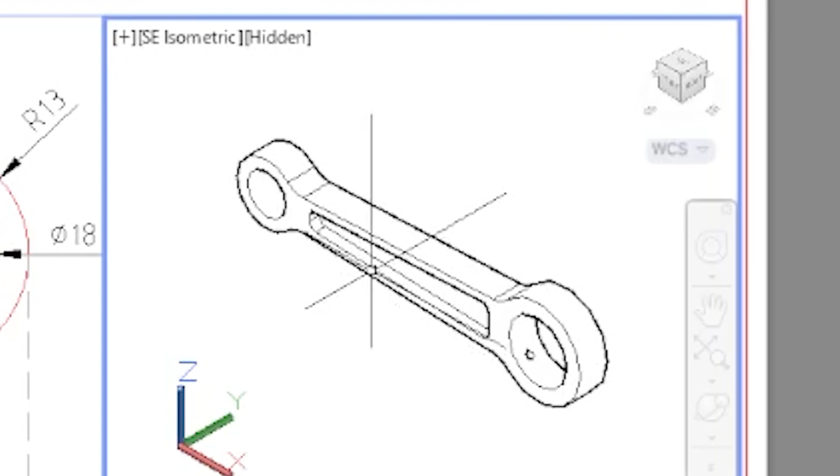So it lays flat in model view, but in its viewport in the layout view, it is rotated by 90 degrees in a different direction, which amounts to laying this in an isometric position. And so now it should be good to go. We're going to resize this back to where it was, and now we have an isometric view of a 3D model combined with the rest.

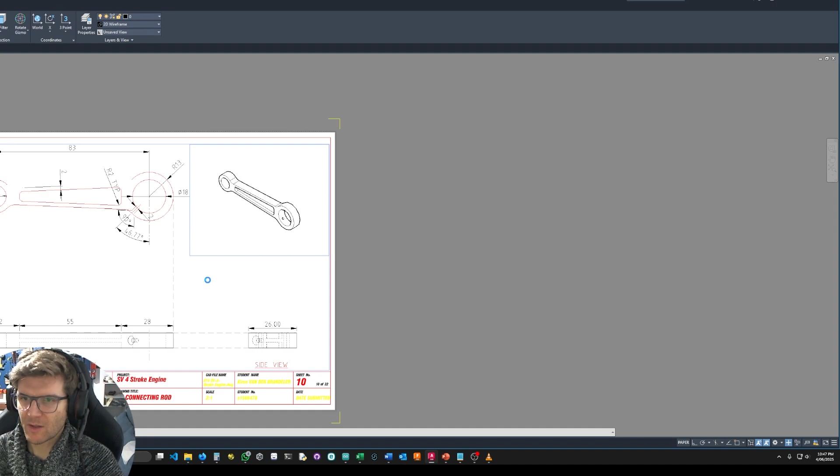I'm going to check what it looks like when we plot it. MP-Eng-Tech, choose DWG to PDF, apply to layout, preview, and now without the layout stuff, it looks pretty good. The only thing is it seems that there is some interference with the top line. I'm not exactly sure what is going on, but for the most part this looks pretty much what I was hoping to show you today.